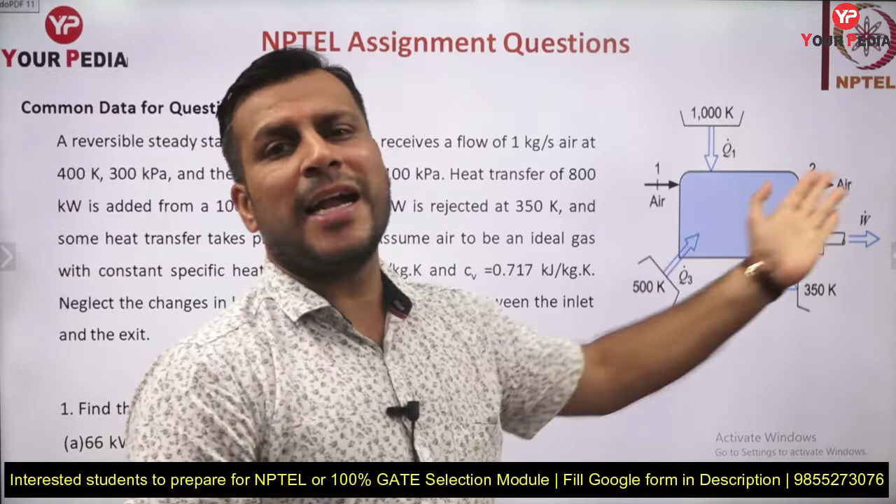So what is he asking? In the first part, he is asking for the heat transfer at 500 Kelvin — what will be the heat transfer in this case? Guys, typically when we solve this kind of question, most of you are aware of problems where heat is received from one source, from another source, and rejected to another sink. We are much aware of these kinds of questions.

But in this case, other than heat transfer, mass is also entering — it's not that only heat is entering. So if you want to find out this heat transfer, you cannot apply the cyclic integration here. You will not be able to apply the cyclic integration of dq by T equal to 0 here. With this you are not going to get the answer, although this device is reversible and in steady state. If you apply q1/T1 + q2/T2 (both positive heat addition) minus Q2/T2 which is at 350 Kelvin, you are not going to get the answer. Why? Because other than heat transfer, mass is also entering and mass is leaving.

So then how to solve? The question arises how to solve. Other than this, there are two parts in this question. This is part 1 and this is part 2. He is asking you the rate of work produced also - so rate of heat transfer, rate of work produced. Both these two things you need to find out, and two very important concepts we are going to discuss through this question.

Let me first discuss with you some of the very general things, like what do you mean by this reversible and steady state?

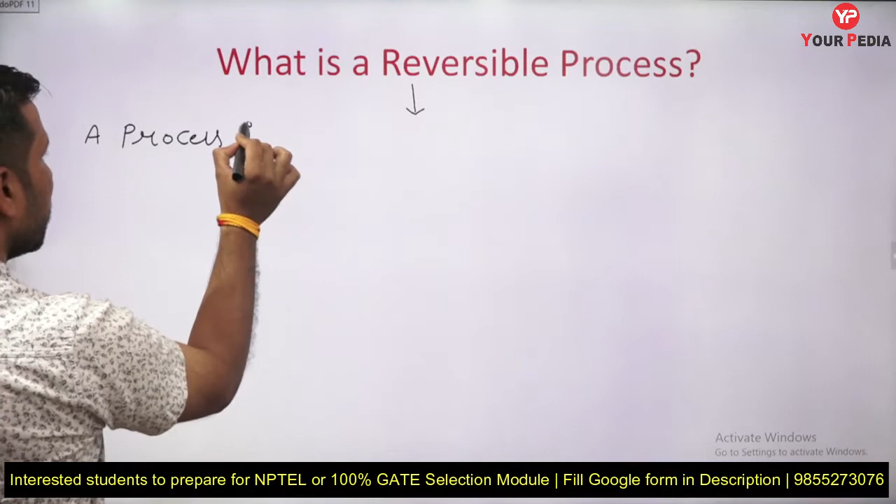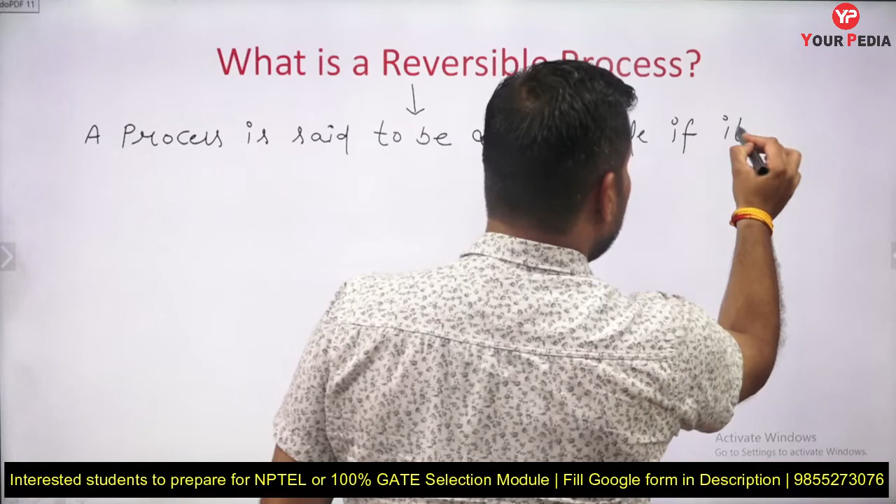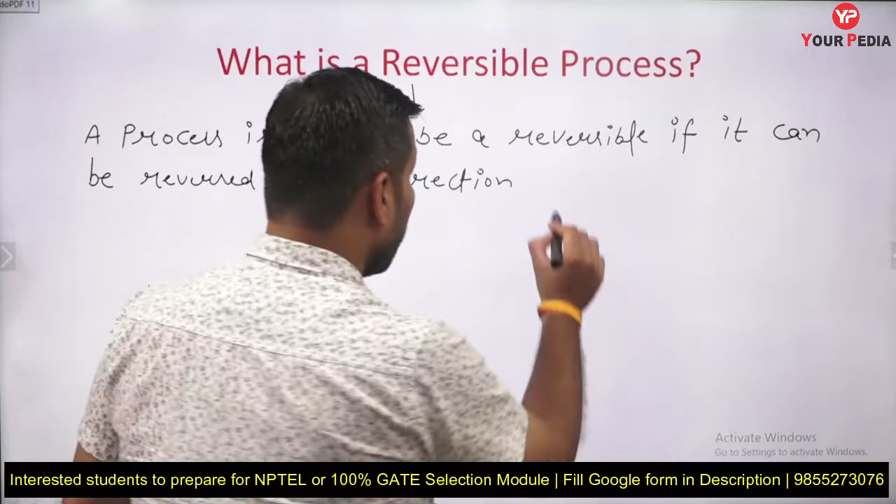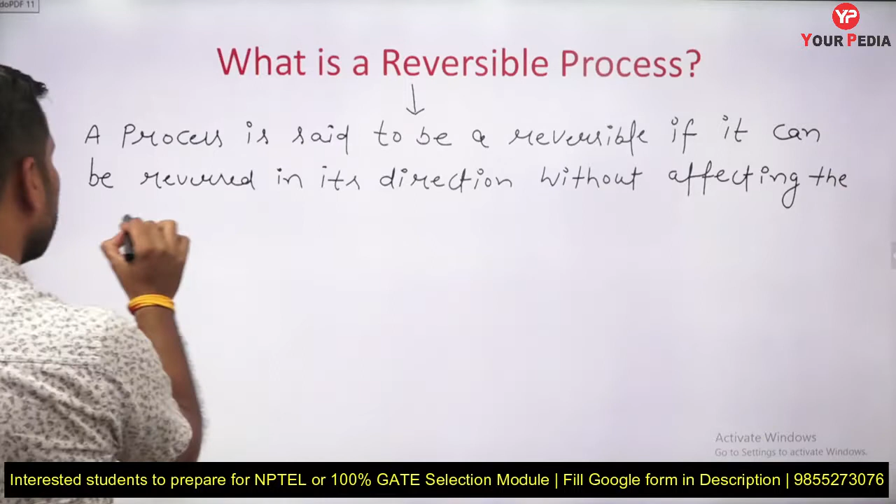You all know reversible means a process. Let me write it here. A process is said to be a reversible process if it can be reversed in its direction without affecting the universe. Universe means system plus surrounding. So merely reversing the direction of a process doesn't mean the process is reversible.

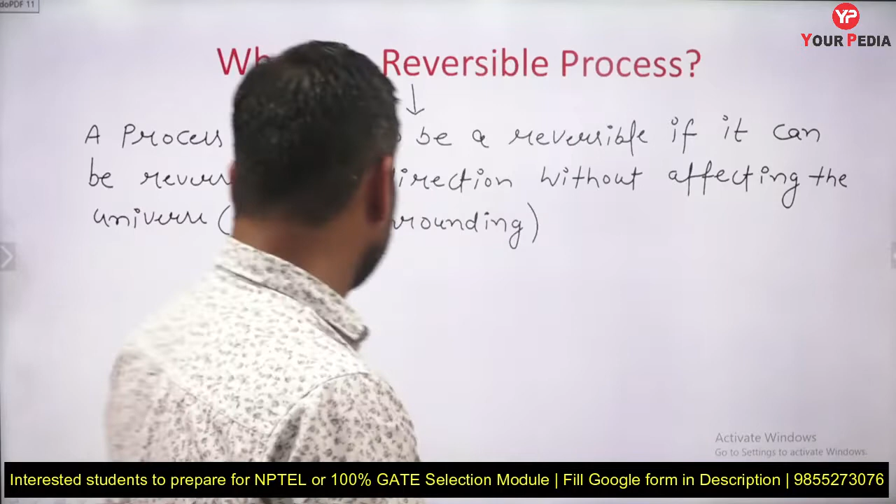Friction cannot be 0, so there is friction, and due to friction heat is going into the surrounding. Heat is lost into the surrounding.

It is negative actually, minus Q surrounding. Why? Because heat is entering into the surrounding - you are not taking heat from the surrounding, heat is entering into the surrounding.

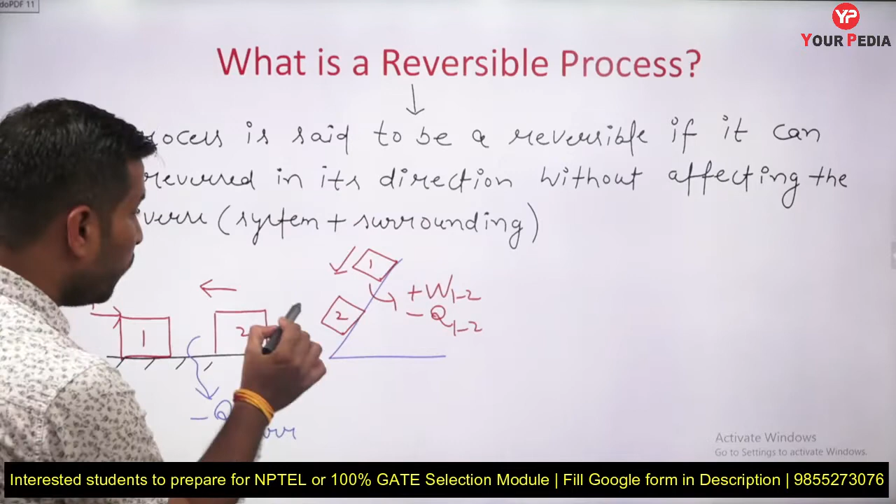Displacing - in this case, suppose 1 to 2 we got some positive work. Now moving 2 to 1, we are supplying some work. Suppose W1 to 2 is positive, W2 to 1 - this is W2 to 1 negative, for example.

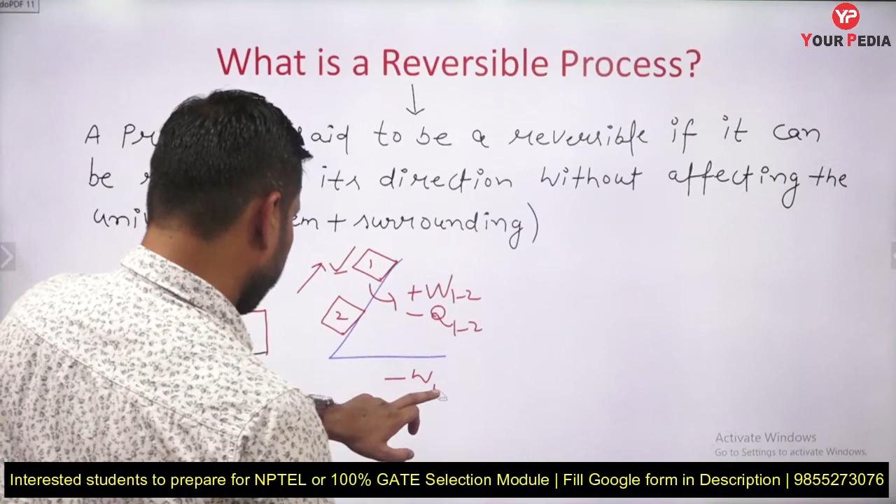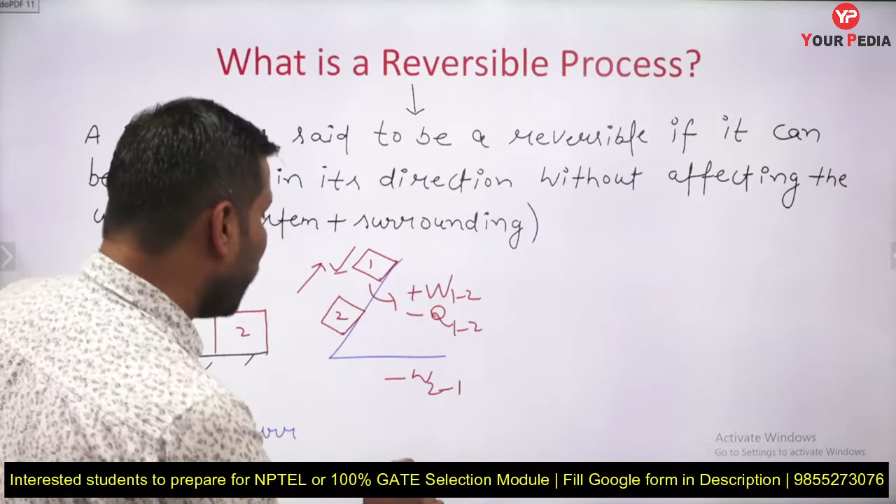So this is negative 2 to 1, but when you are moving it 2 to 1, again due to friction heat is going to generate, and that heat again goes into the surrounding. So Q1 to 2 is negative, heat is going into the surrounding. Q2 to 1, again heat is going to the surrounding.

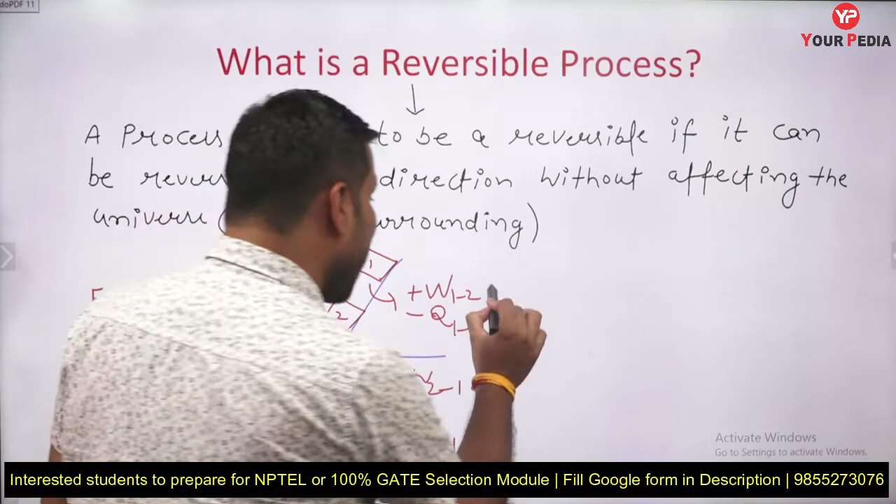So there is a net effect remaining on the surrounding. Net effect is there - net effect is remaining on the system and surrounding.

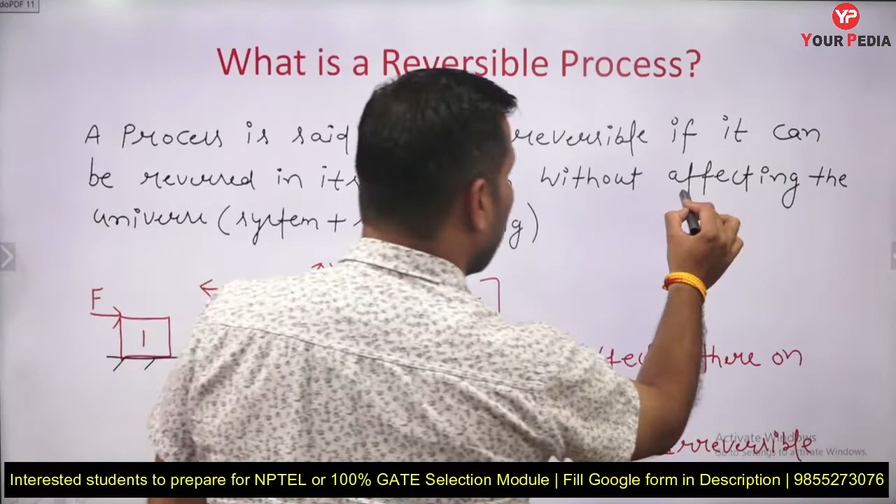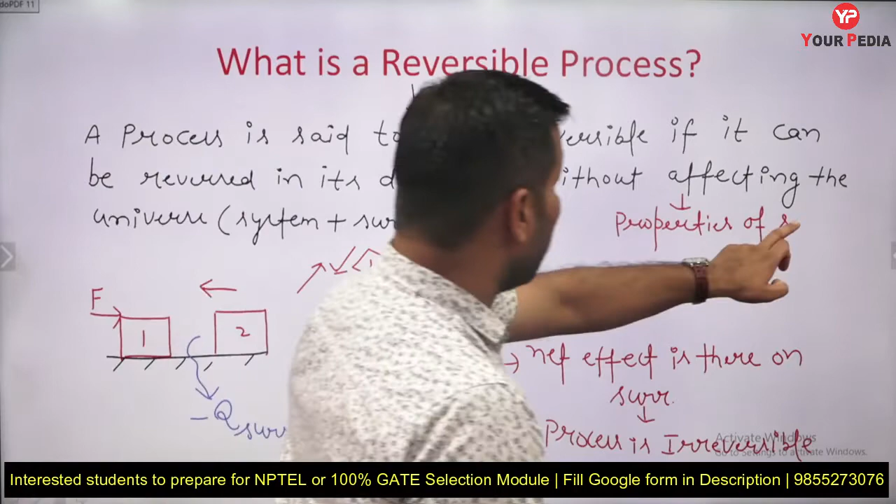Okay, a process is known as reversible only if you can reverse it in its direction without affecting the universe, means without affecting the properties of universe. देखो affecting the universe का मतलब क्या है? Properties of universe. यूनिवर्स का प्रॉपर्टीज अनअफेक्टेड रहना चाहिए. There will be no change in the properties of universe. Okay, properties of universe.

But if due to some process the properties of the universe, like it may be system, it may be surrounding, are changing, it means the process is irreversible. In actual case, real life, there is no such reversible process possible. All processes are irreversible only. But you can give some kind of example, like a very slow, or quasi-static isothermal compression or expansion of a gas. That process you can equate with the kind of reversible process.

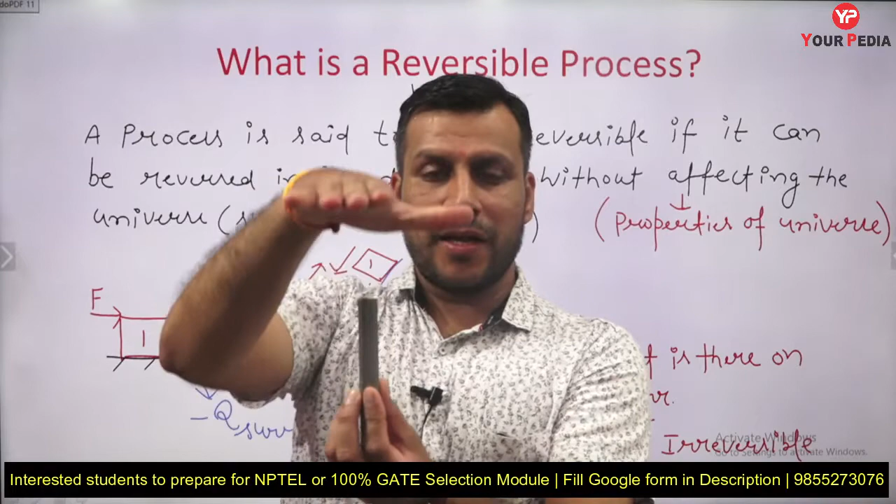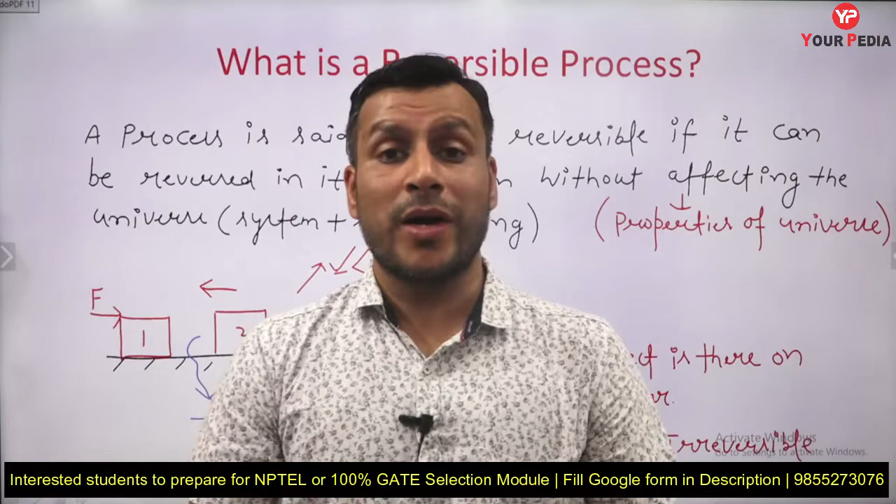Similarly, suppose you are compressing a spring, you are expanding the spring. So compression and expansion of a spring without any kind of hysteresis loss, that is also a kind of reversible process. But in real cases, some kind of hysteresis losses are going to occur. What is hysteresis loss? It is a kind of loss in mechanical energy. When you are carrying out cyclic compression or extension of the spring, some loss in mechanical energy occurs. That is known as hysteresis loss. So in real case, that may be there.

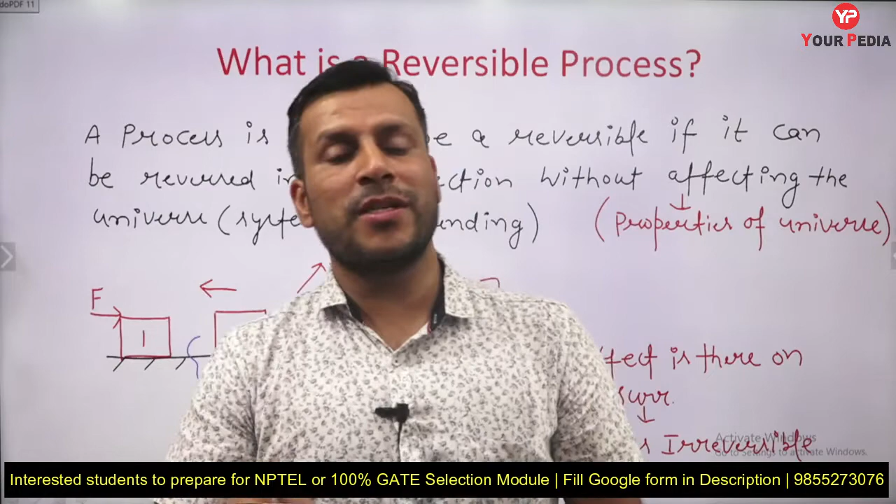Okay, so what you need to think: in a reversible process, no effect is going to remain. There is no such kind of loss in energy going to take place. But in an irreversible process, there must be some loss in energy. Exergy destruction is going to take place. There must be some irreversibility, and there must be some entropy generation in all real processes. Okay, so I think you got the idea. What is a reversible process?

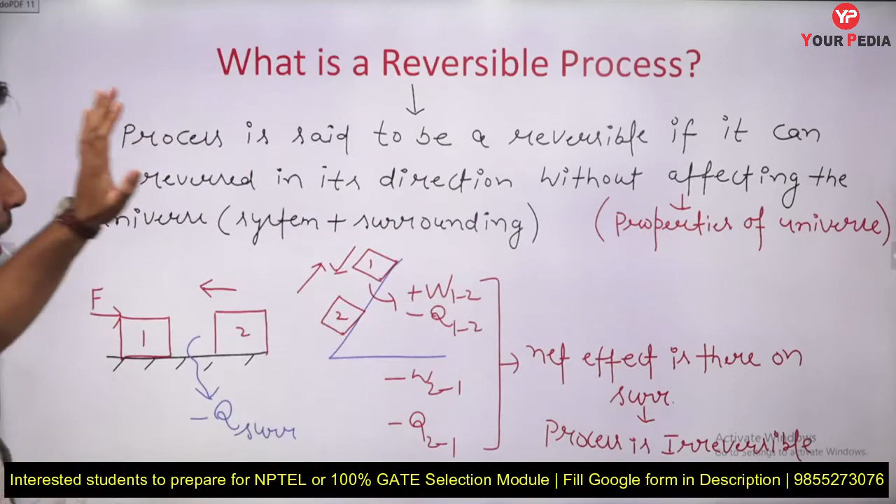A process is said to be reversible if you can reverse it without affecting the properties of the universe. It means the entropy generation is zero. It means irreversibility, which is T naught delta S generation, is zero in a reversible process. किसमें? Reversible में. Reversible में ये क्या होगा? Zero होगा. Entropy generation zero, irreversibility will be zero.

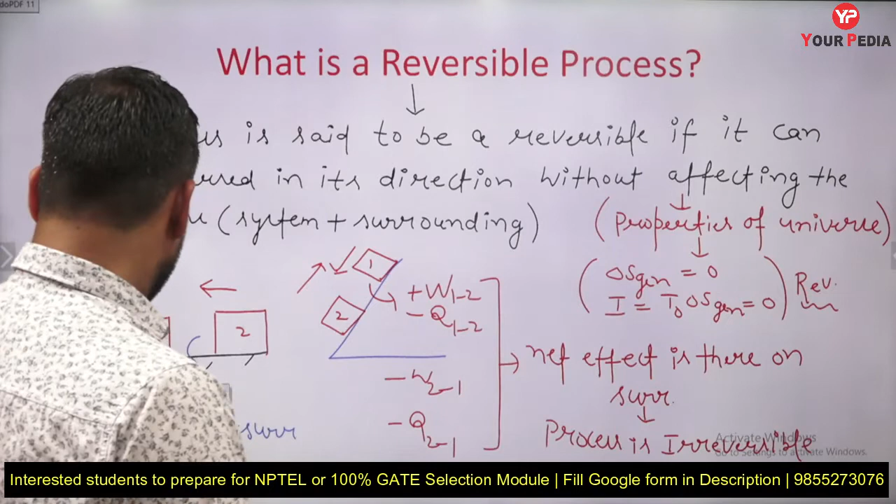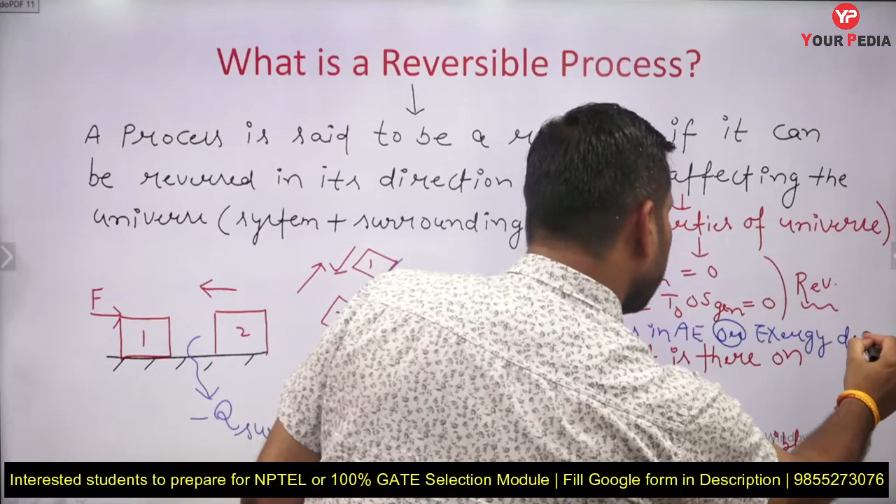And what is irreversibility, guys? Irreversibility is nothing but loss in available energy. Irreversibility को ही हम क्या बोलते हैं? Loss in available energy or exergy destruction. So you can mention it as irreversibility, loss in available energy, or exergy destruction. All will be zero in case of reversible process.

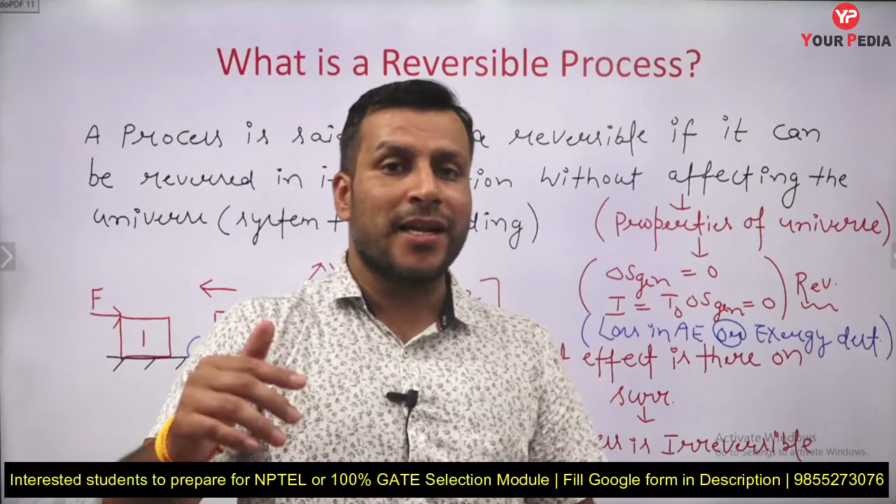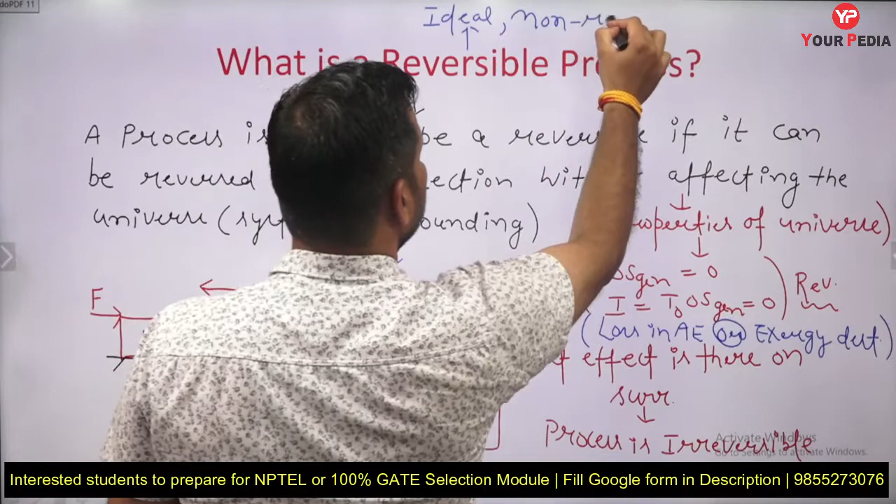But reversible processes are not real processes, guys. These are non-real, hypothetical, or ideal processes. So all reversible processes are ideal, non-real processes. But these are most efficient. ये क्या होते हैं बच्चों? Most efficient. How can you say these are most efficient? Because there is no loss of energy.

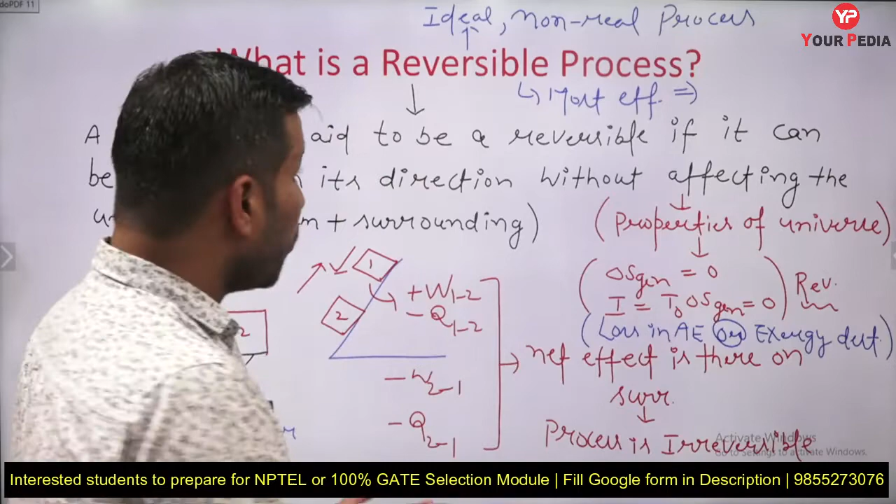And if there is no loss in energy, it means the process is most efficient. That's why reversible processes are the most efficient. I hope you got some basic understanding about this reversible process. Okay, चलिए next हम move करते हैं बच्चों.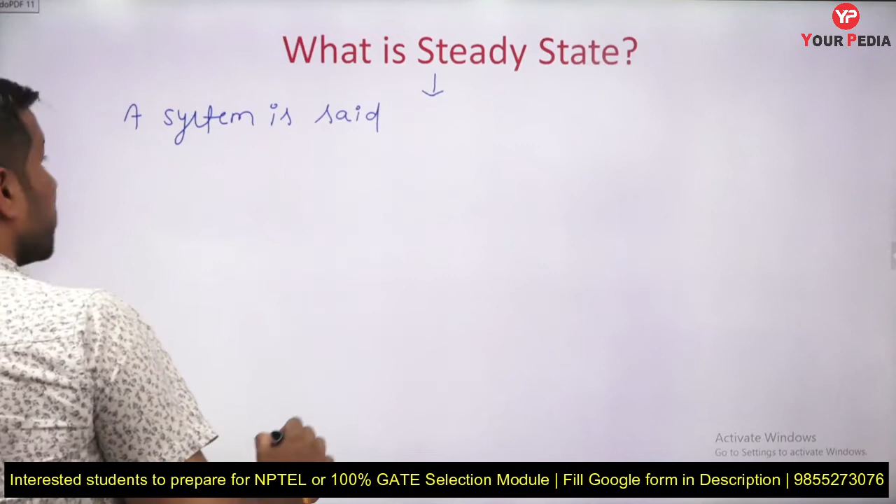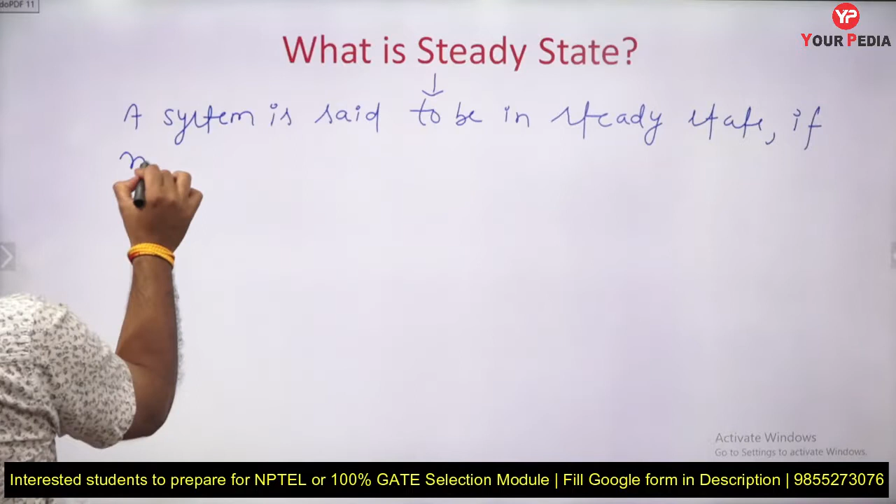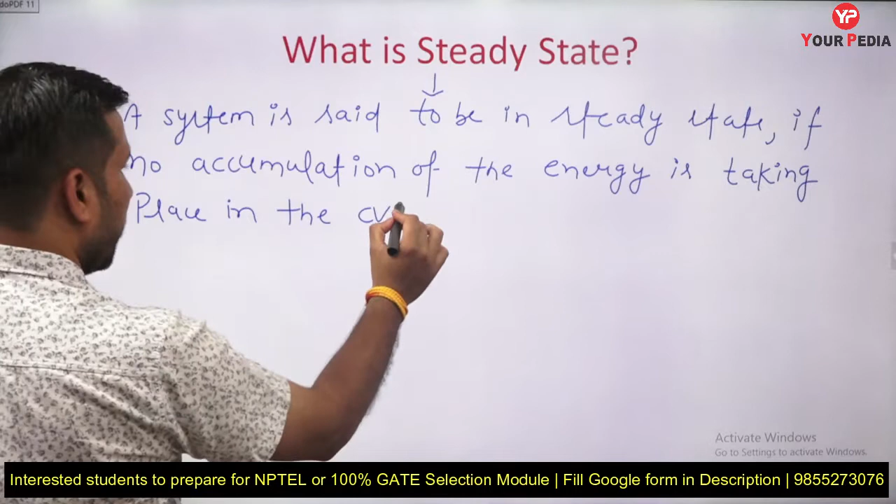Steady state means a system is said to be in steady state if no accumulation of the energy is taking place in the control volume. If no accumulation of the energy is taking place in the control volume, then that state of the system is known as steady state.

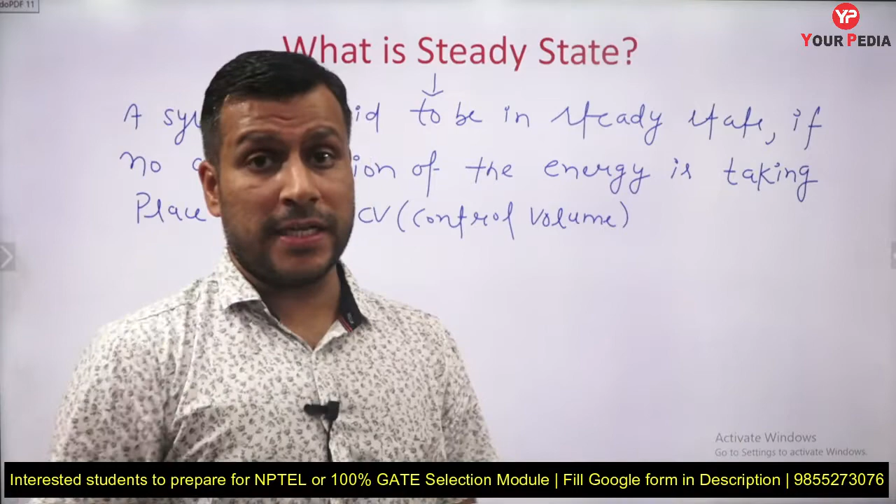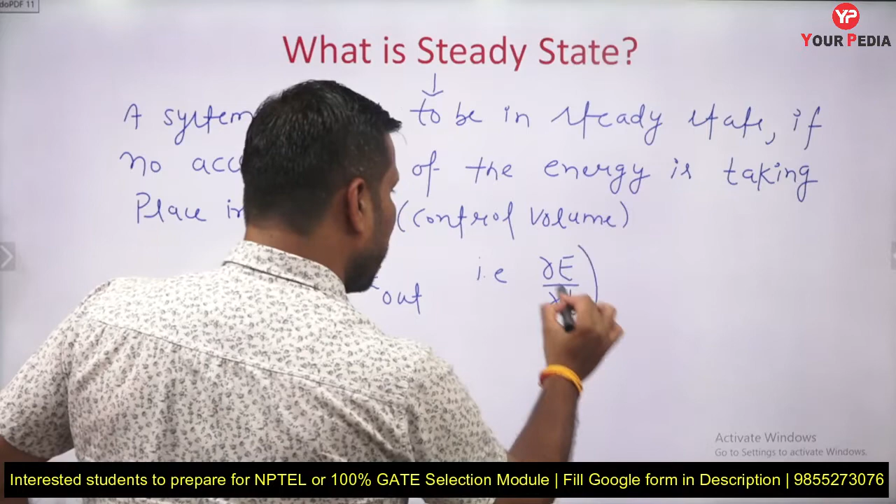Okay, no accumulation of the energy is taking place means, when will this happen, kids? When whatever energy is entering, that is equal to energy leaving. It means that the rate of change of energy of the control volume is zero. The energy of your system is not changing with time. So if energy is not changing with time, then del E by del t of the control volume will be zero.

Okay, so what is the general equation, guys? The general equation is rate of energy in minus rate of energy out is equal to del E by del t of the control volume. This is the general equation for any steady or unsteady system. For unsteady, this term is going to exist, but for steady this term will be 0. And if this term is 0, then you can write the rate of energy in is equal to rate of energy out. This is a very important equation for steady flow.

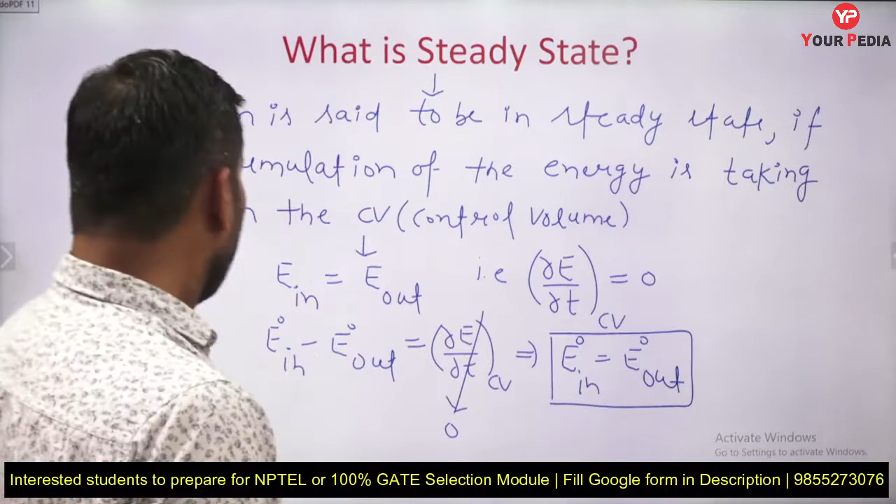Steady flow, and this equation we are going to apply to this particular question. Rate of energy in equal to rate of energy out. There is no accumulation of energy taking place in the control volume. One more thing you can write here: the properties of the control volume. Because if there is no accumulation of energy in the control volume, it means the properties of the control volume are not going to change with time.

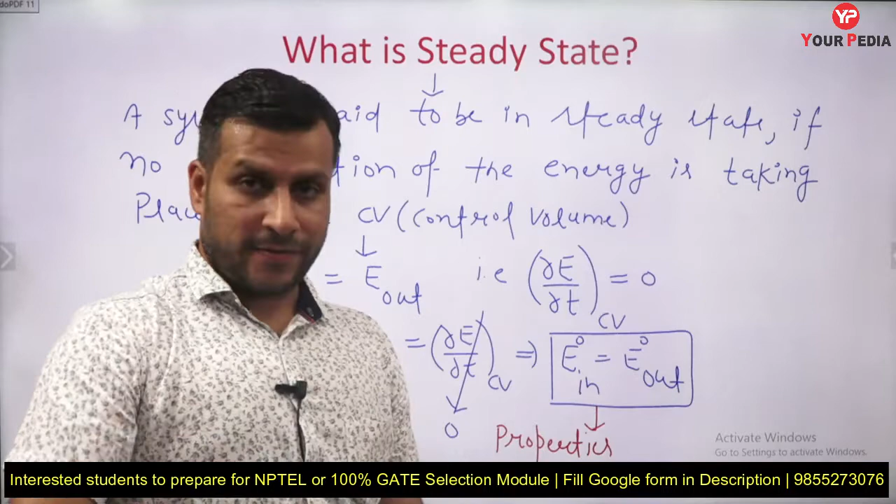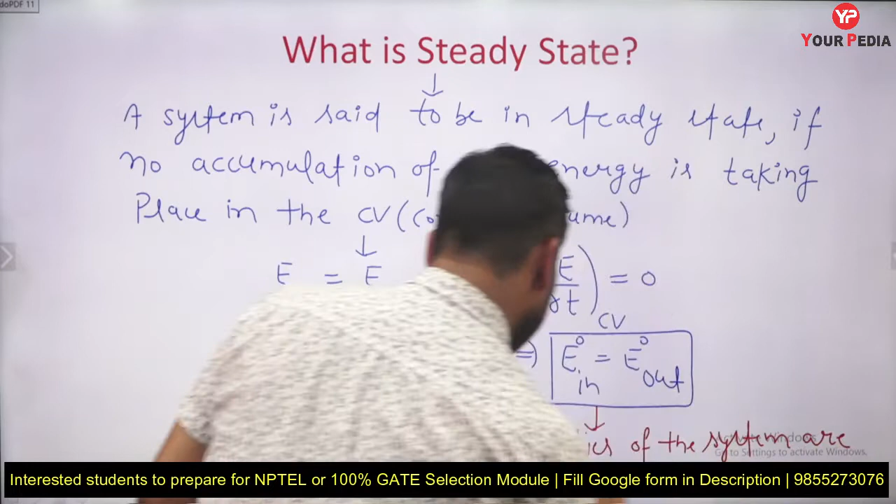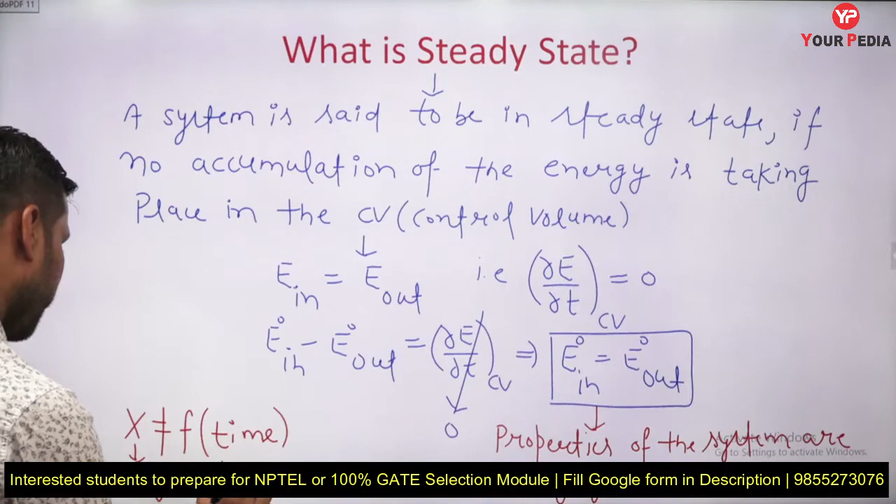Properties are invariable with time. Properties of the system are not changing with time. So suppose any property x is not a function of time. This is any property. But in case of unsteady, the property becomes a function of time, because accumulation of energy takes place in an unsteady system.

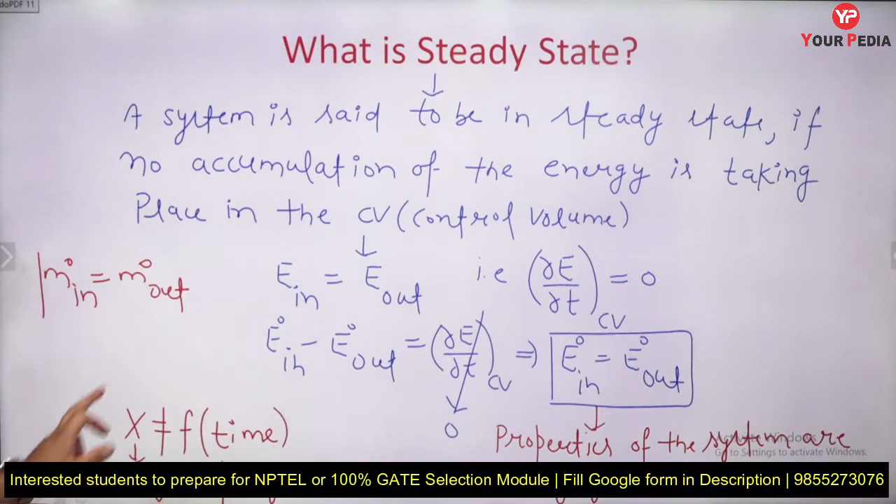Okay, so in steady state energy in equal to energy out, and here you can write one more thing: mass in equal to mass out. There is no accumulation of mass taking place either. No accumulation of mass as well as no accumulation of energy in case of steady state. So I think you got some basic idea about steady state and reversible process.

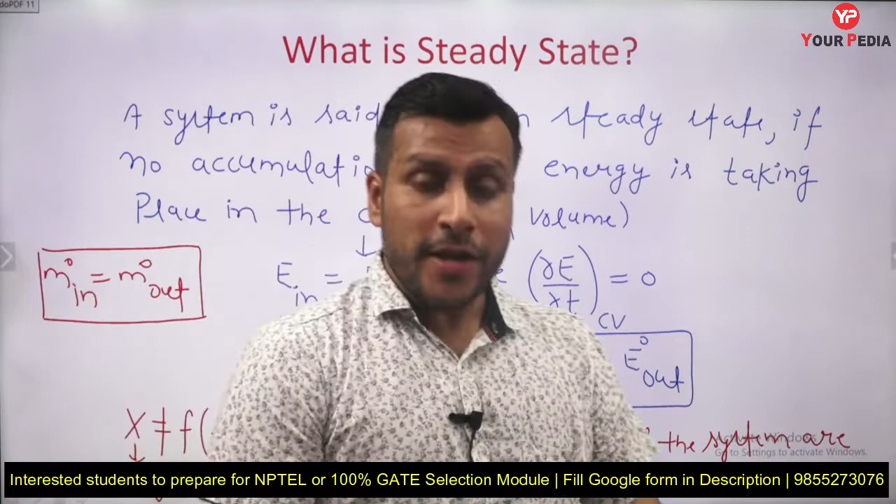Now let us quickly move to our question. So this is the question. I just discussed these basic things so that you will get some basic idea. I hope you also know all those kinds of things. So now this is the question in front of us.

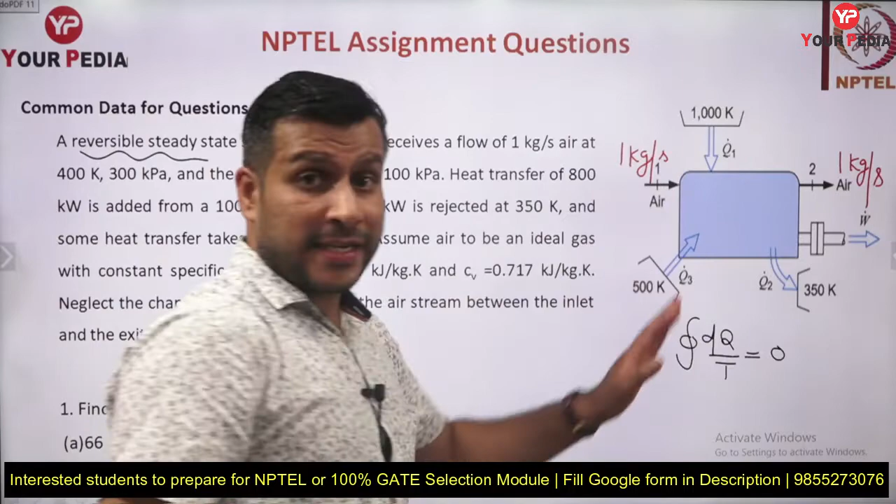1 kg per second of air is entering; this is the mass of the air entering. Obviously, if this is in steady state, whatever mass is entering, the same mass is leaving, because there is no accumulation of mass. He has not given you the exit mass, but we know it, because it is in steady state. The process is reversible. So what idea are we going to get?

This we cannot write, because other than heat, there is mass interaction also taking place. But what can we use here, kids? We can use that entropy generation will be 0, because this is a reversible process. So if this is reversible, entropy generation will be 0.

Entropy generation will be 0. Okay, this is in steady state. Steady state में भी है. It means what? It means the change in entropy of the control volume, dS/dt of the control volume, that is also 0.

Entropy is also a property, guys. It is a kind of extensive property, so it depends on the size or mass of the system, but entropy is also not going to change. In steady state, the change in entropy of the control volume is also 0. There is no entropy generation. Why? Because the process is reversible. It is in steady state, so change in entropy of the control volume is 0.

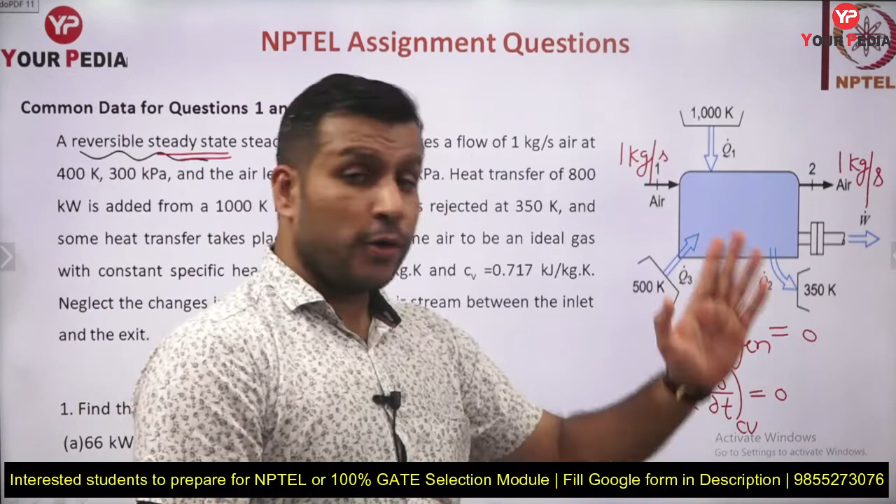So from this, we will get the very important relationship: rate of entropy in minus rate of entropy out plus rate of entropy generation. I am writing all these terms in terms of rate actually. Rate की term में लिख रहा हूँ. Why? Because he has given you all the heat transfers in watts.

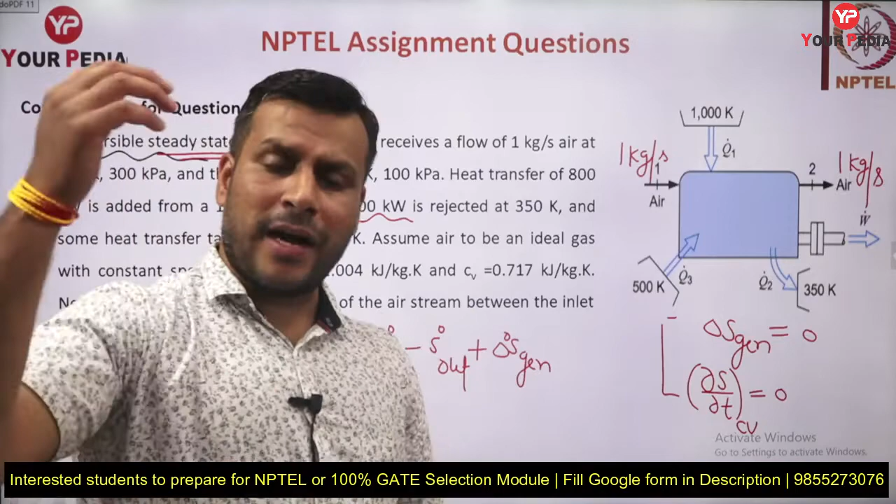Okay, और आंसर भी किस में आ रहा है? Watts. All answers are given in watts. That's why I am writing entropy rate, and the energy balance also I am going to write in terms of watts. So rate of entropy in minus rate of entropy out plus entropy generation equals rate of change of entropy of the control volume.

Now you know in steady state this is 0 and this is also 0. So whatever entropy is entering, that is equal to entropy leaving. Got that idea, guys? So this is the first equation which we got. पहला इक्वेशन अपने पास आ गया है.

But other than heat, the mass is also bringing entropy inside the system. Listen very carefully: if there is no mass transfer, how much entropy is heat going to bring? The heat is going to bring Q/T positive, minus Q/T for heat that is going out. So entropy of the system is going to decrease when heat is going out.

So Q1/T1 plus Q3/T3 minus Q2/T2, that will be 0 if there is no mass transfer, because mass is not entering, so mass is not going to bring any entropy. Suppose it is a closed system, only heat transfer, no mass transfer; then you can write the equation I mentioned earlier, cyclic integral of dQ/T equal to 0, because the process is reversible.

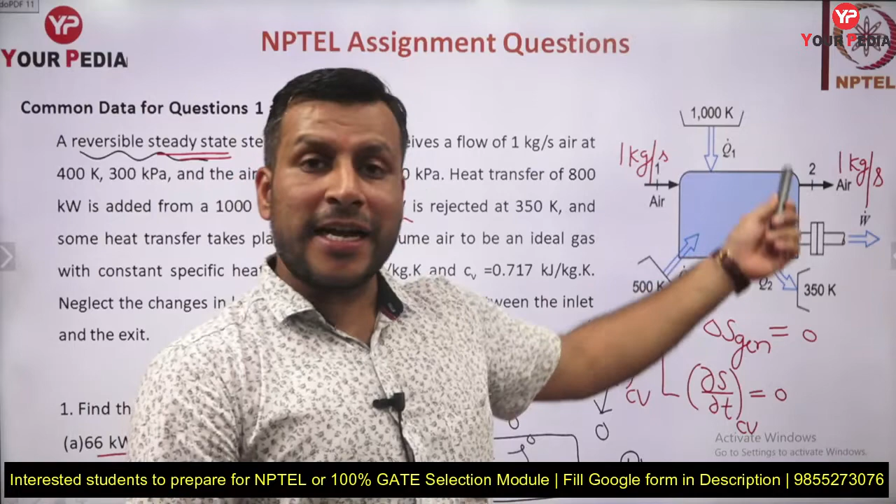But in general, the cyclic integral of dQ/T, you know how we write it: Clausius inequality. तो वहाँ पे अपने को क्या समझना पड़ेगा? It can be 0 or less than 0. For reversible it will be 0, for irreversible it will be less than 0. And dS is greater than or equal to dQ/T. For reversible, dS equals dQ/T. That's why the entropy heat is bringing is Q/T, in case of a reversible process.

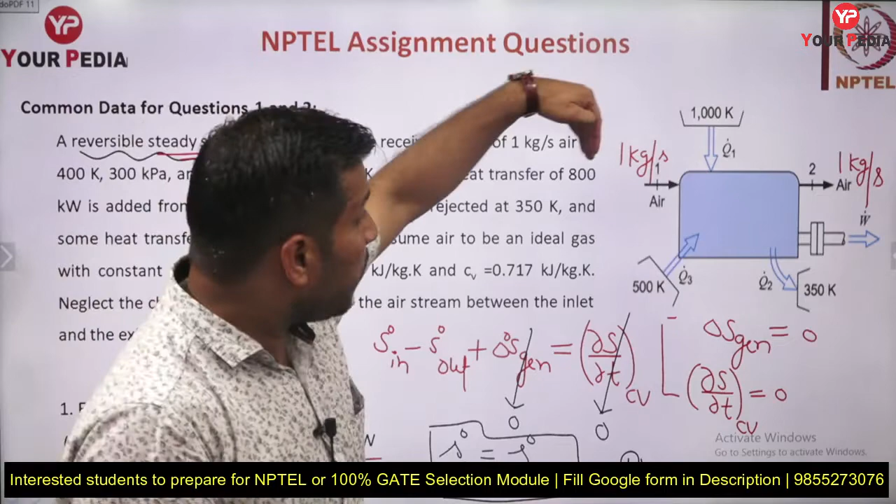But here the mass is also entering, so you need to include whatever entropy this mass is bringing in and taking out. Suppose this point is 1 and this point is 2, mass flow rate is the same, so entropy in with mass is m dot s1 and entropy out is m dot s2. So plus m dot s1 minus m dot s2, or you can write it on this side, आप इसको इस side भी लिख सकते हो, because entropy in equals entropy out. So this is the first important equation.

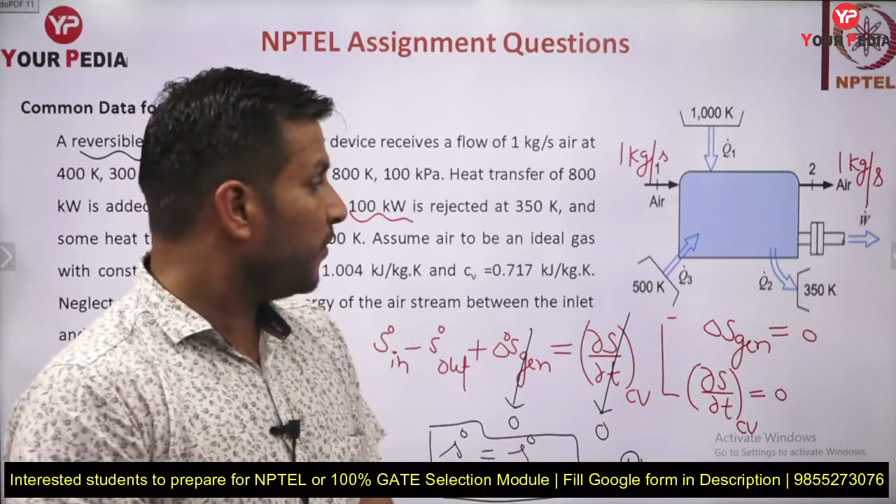Other than this, guys, we have one more equation. The system is in steady state, so whatever energy is entering is equal to energy going out. No accumulation of energy. Energy in equals energy out. But what is entering, guys? Is only heat entering, or heat and work interaction? No. Other than heat and work interaction, mass interaction is also taking place, and mass can also bring some kind of energy.

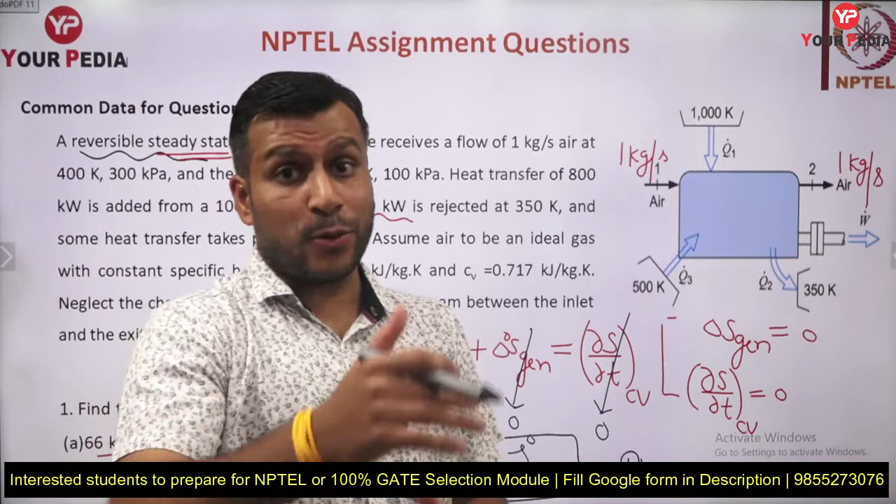But here if you will check, neglecting the kinetic and potential energy changes, काइनेटिक एनर्जी और पोटेंशियल एनर्जी चेंजेस को अगर हम नेग्लेक्ट कर दें, neglecting kinetic energy and potential energy changes,

so mass can bring some kind of kinetic energy, potential energy, and what? The enthalpy. And you can write it here internal energy also, or entry flow work, exit flow work. But you know how we write steady flow energy equation? H1 plus C1 square by 2 plus gZ1 plus Q, that is equal to H2 plus C2 square by 2 plus gZ2 plus work.

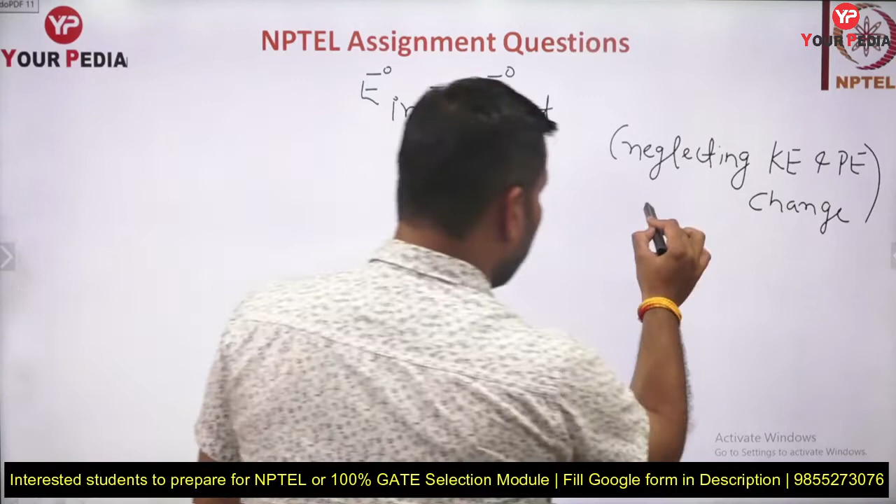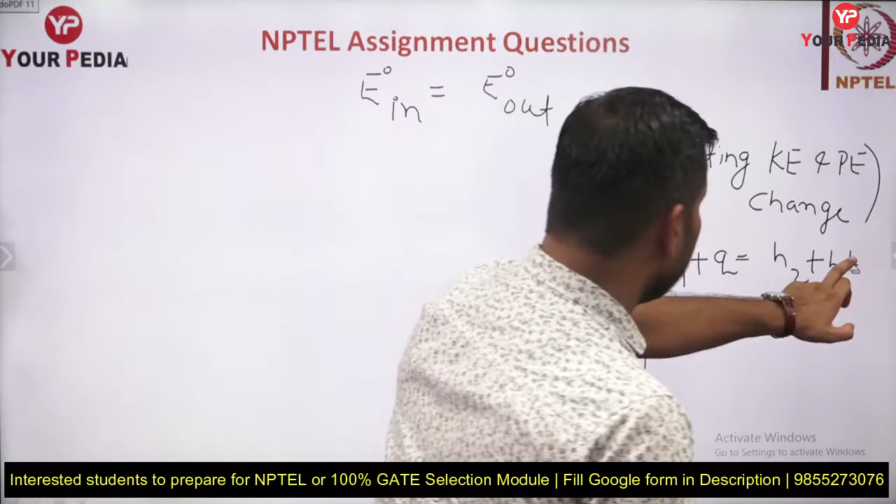But if there is no change in kinetic and potential energy, then we can simply write it as H1 plus Q, that is equal to H2 plus W, something like this. H1 plus Q, that is equal to H2 plus small WCV. That will be small WCV in case of what? Neglecting the kinetic and potential energy changes.

Are you getting guys? So similar kind of energy equation we can write it here also. This is capital E, energy in. Mass is entering with some enthalpy H1, because it is entering at point 1. So this is H1 plus, how much Q is entering guys? Q is entering at 1 and 3. So I am writing it as Q1 plus Q3, yes or no? H1 plus Q1 plus Q3.

How much energy is going out guys? Energy going out is H2 plus Q2 plus W, yes or no? This is in terms of total energy, neglecting kinetic and potential energy changes. Now how you can write this H1? This you can write it as M1 dot into Cp T1, considering air is an ideal gas, plus

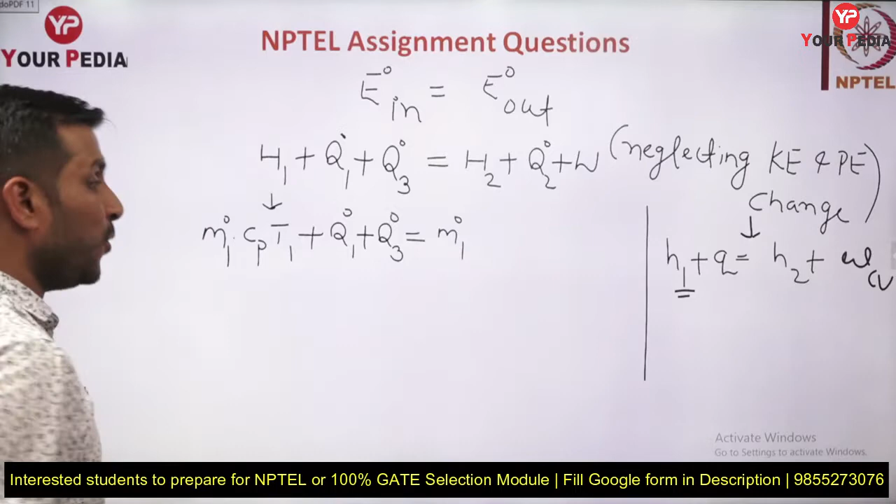Q1 dot plus Q3 dot equal to M. This mass is same, so you can write it as M1 dot or M2 dot, both are same. दोनों क्या है बराबर है. So this is M2 dot Cp T2 plus Q2 dot plus W. Now let us put all the values.

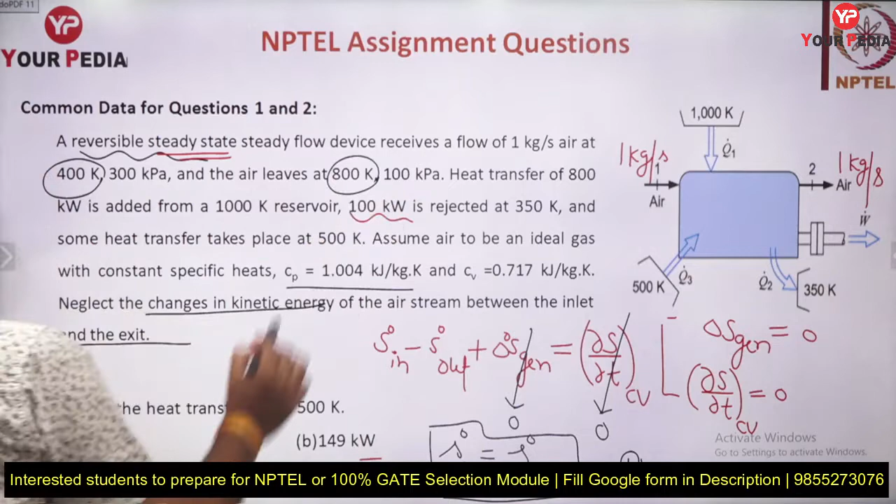So M1 dot is what? This is 1. इसको मैं इधर ले आता हूं. So this is 1 into Cp is 1.004 kilojoule per kg Kelvin. I think these values are given to you. The change in temperature is T1 minus T2. The entry temperature is 400. The exit temperature is 800. So 400 minus 800. Plus, how much Q is entering?

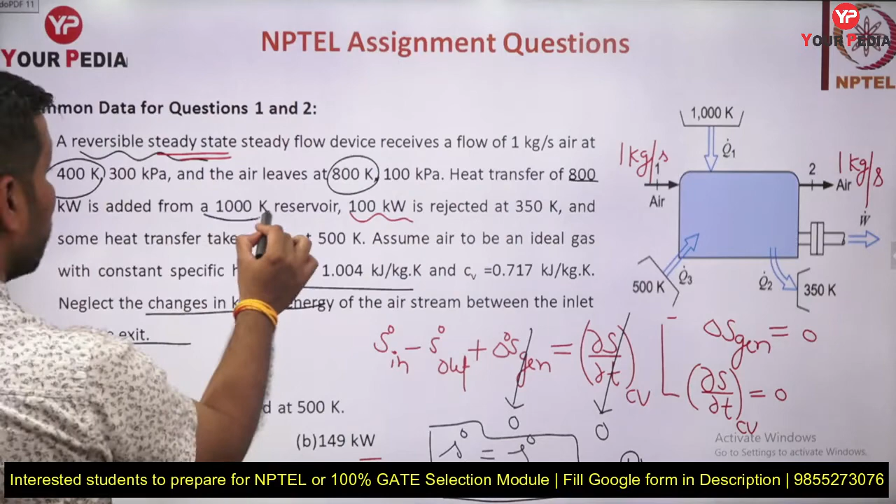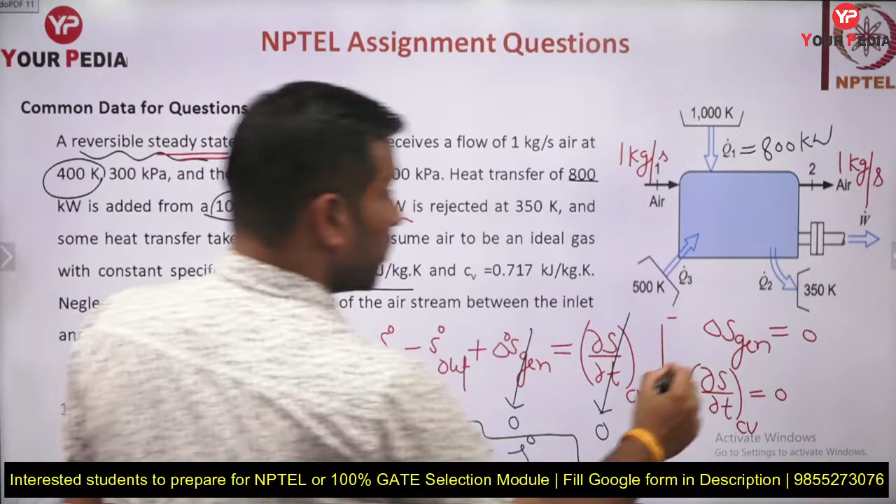How much Q is entering, guys? Let's check it here. Heat transfer of 800 kilowatt is taking place from the 1000 Kelvin reservoir. Means Q1 equal to 800 kilowatt. 100 kilowatt is rejected, so this is 100 kilowatt. And Q3 we don't know, this we want to find out actually.

ये तो अपने को नहीं पता. And this one is 100 kilowatt. This is positive, this is negative. Q3 we don't know. ठीक है, चलिए. So Q1 is 800, Q3 we don't know. This term already we have mentioned it here, so no need to write minus here. Minus यहाँ लिखना नहीं है बच्चों.

Why? Because already we are writing energy in equal to energy out. So अगर आपको इसको इधर लेके आना है, then obviously that will become negative. Energy in will be positive, energy out will be negative. When we are writing it on this side, heat added to the system is considered positive, rejected by the system is considered negative.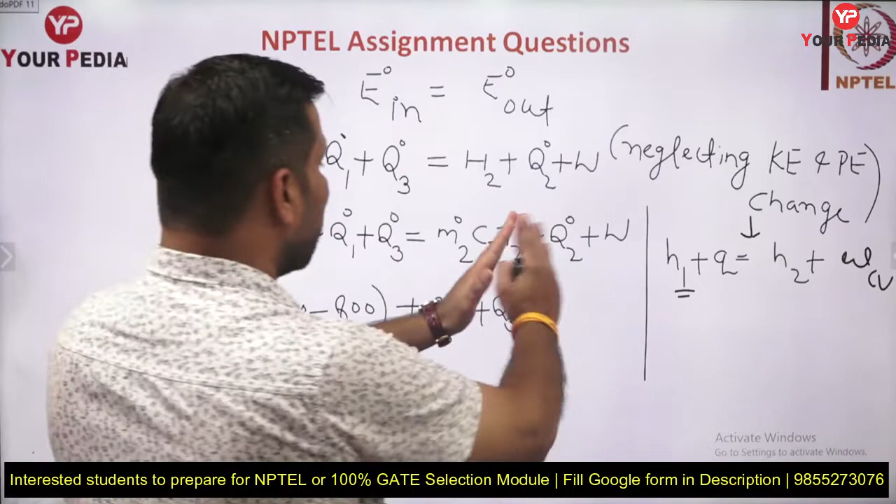Similarly, work done by the system is positive, but if work is done on the system, it will be negative. If you are writing work this side, that is negative work; when it goes the other side, it becomes positive. So we are writing energy in equal to energy out, that's why no sign is required. So Q2 is 100 plus W. Now can you solve and make some equation out of this, guys? क्या इसको solve करके कुछ equation बना सकते हो बच्चों? Yes.

So let me solve it for you, and you also can try to solve. You can try to make some kind of equation out of this. Okay, so if you solve this, you will get 298.4 equal to W minus Q3 dot. So this is the equation we are going to get. Suppose this is equation number 2: 298.4 equal to W minus Q3 dot. This equation we get by applying the energy balance.

Now let us apply the entropy balance also, the one we were writing earlier. So let me add a slide here. Fine. So now we can write the entropy balance here.

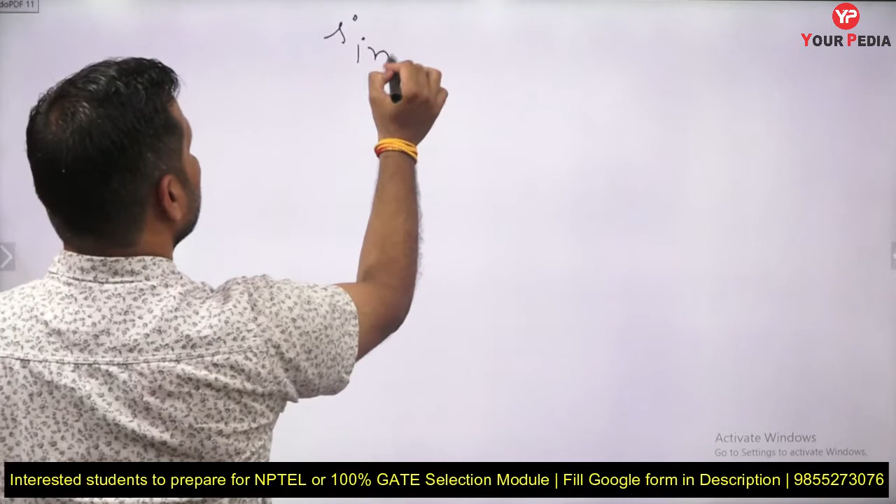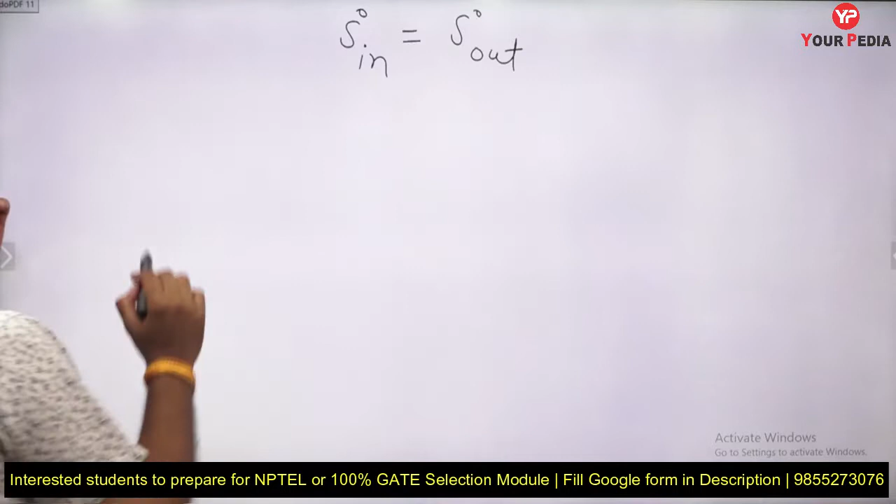Entropy balance, how can we write it? Rate of entropy in is equal to rate of entropy out, or you can write it in capital terms also because masses are same. So we write it in capital form: entropy in equals entropy out. How much entropy is heat bringing? That is Q1 dot divided by T1, that will be positive.

Plus Q3 dot divided by T3, plus M1 dot into small s1. That is equal to how much entropy heat is taking out: Q2 dot divided by T2 plus M2 dot into s2. This is how we can write the entropy balance. Entropy in equal to entropy out.

Now you know all these values. Q1 is 800 kilowatt divided by 1000. Q3 dot we don't know, divided by T3. What is T3, guys? T3 is 500 Kelvin, so you can write it here, plus M1 dot is 1 kg into s1 minus s2.

Or I will take this to the other side, because for change in entropy we are familiar with formulas like s2 minus s1. So let me bring this heat to this side, so this will be minus. This is heat which is going out.

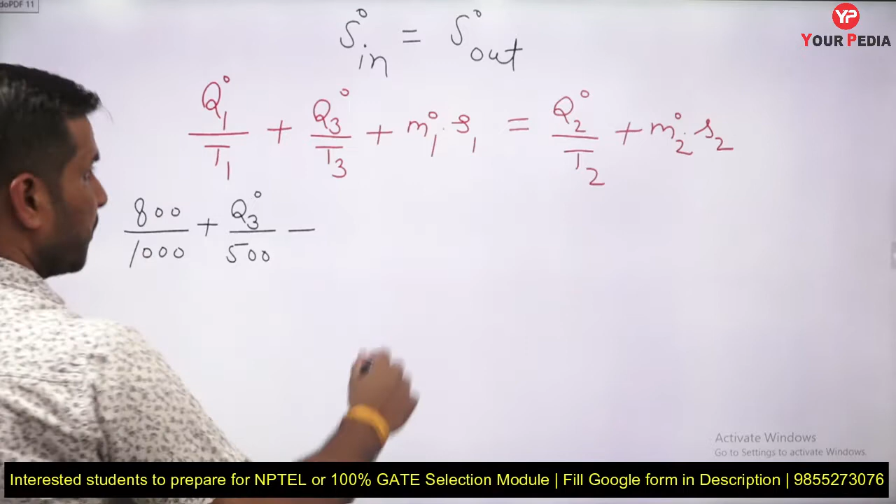How much heat is going out? This is 100 divided by the temperature, 350, equal to M1, M2 both same, which is 1, into s2 minus s1. This is the final equation, guys. Now how to write s2 minus s1?

Entropy change for an ideal gas, s2 minus s1, specific entropy change, is Cp ln T2 by T1 minus R ln P2 by P1, because the temperatures and pressures are given to us. If you check here, the entry temperature and entry pressure are given.

Here the entry temperature is 400 Kelvin and entry pressure is 300. The exit temperature is 800 Kelvin, exit pressure is 100 kilopascal. So entry temperature, pressure and exit temperature, pressure we know.

Now put it all here, and you know the Cp value also. Cp value is given, Cv value is given, and the difference Cp minus Cv is R. If you subtract, you are going to get a value close to 0.287, because this is very close to 1.005.

This is 0.718, so you are going to get 0.287. You can check. R we know, this we know.

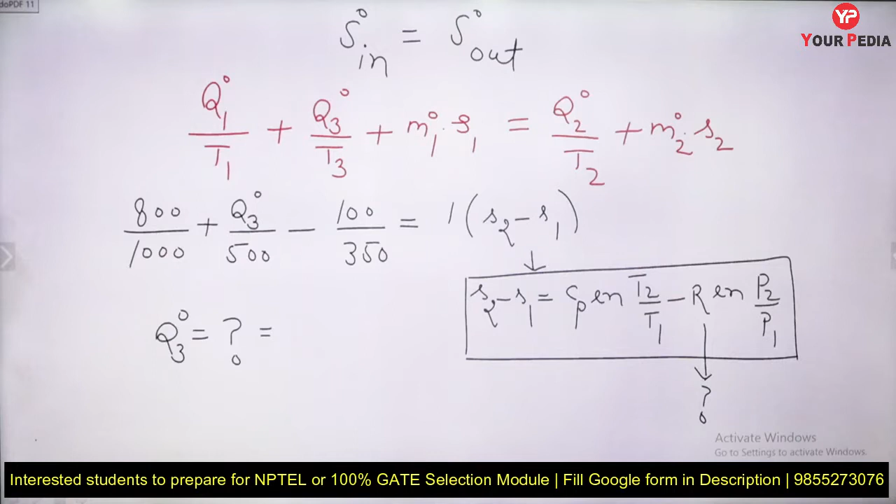Solving this term, we will get S2 minus S1. This will come out close to 1.01121, which is in kilojoule per kg Kelvin, because this is specific entropy.

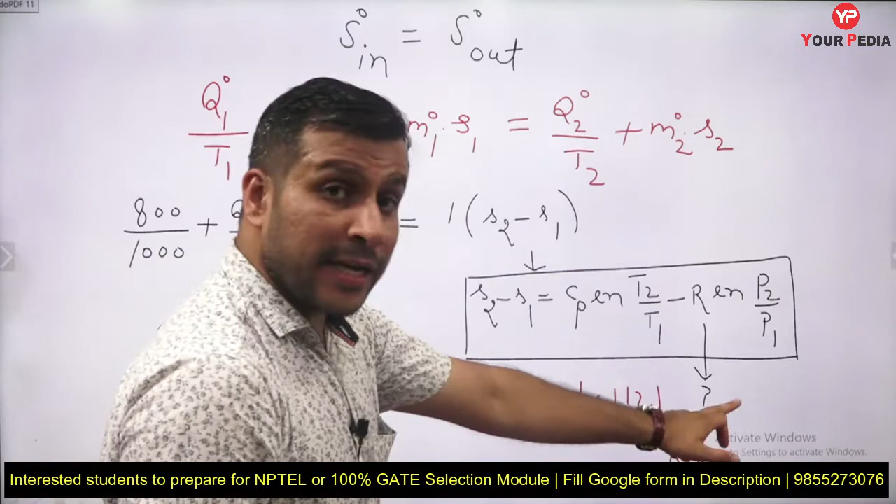If you multiply it with kg per second, we will get kilowatt per Kelvin. So these all terms are representing kilowatt per Kelvin. Solving this, we are going to get Q3 in kilowatt. Now can you tell me guys what value you are getting for Q3?

So solving this, we will get Q3 equals 248.46 kilowatt, which is very close to 248 kilowatt. You can check whether you are getting this answer or not. So option D becomes the right answer for this first question.

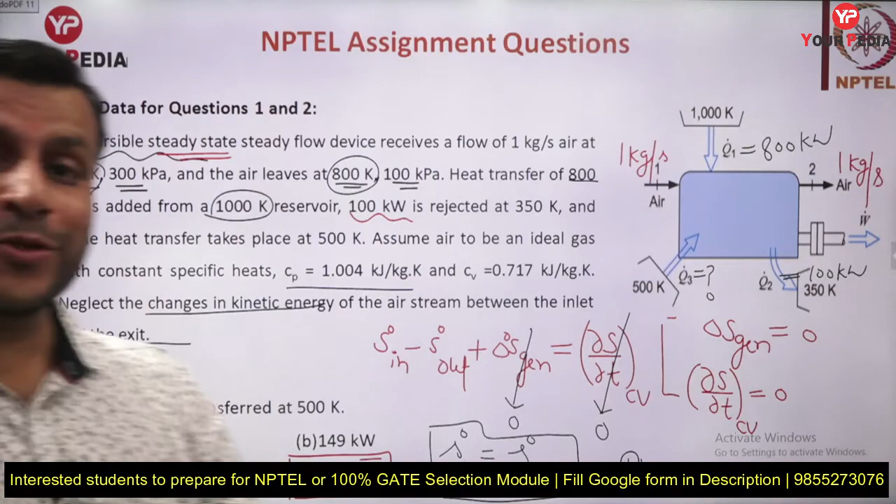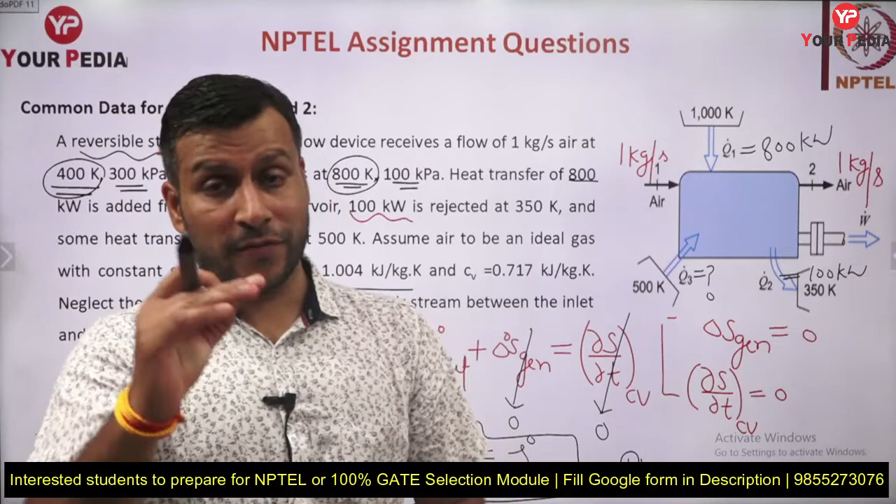So what information did we get through this question? The process is steady, the process is reversible, but we cannot apply cyclic integration dQ by T because there is mass transfer also. So we need to apply the entropy balance here. This is a very important concept which we learned, and other than this we learned the energy balance also.

Now we know this heat transfer, and using the energy balance we developed an equation, equation 2. This we got close to 248 kilowatt. So if you put this 248 kilowatt, we will also get W, the work transfer. So two equations we developed, one using the entropy balance, second using the energy balance.

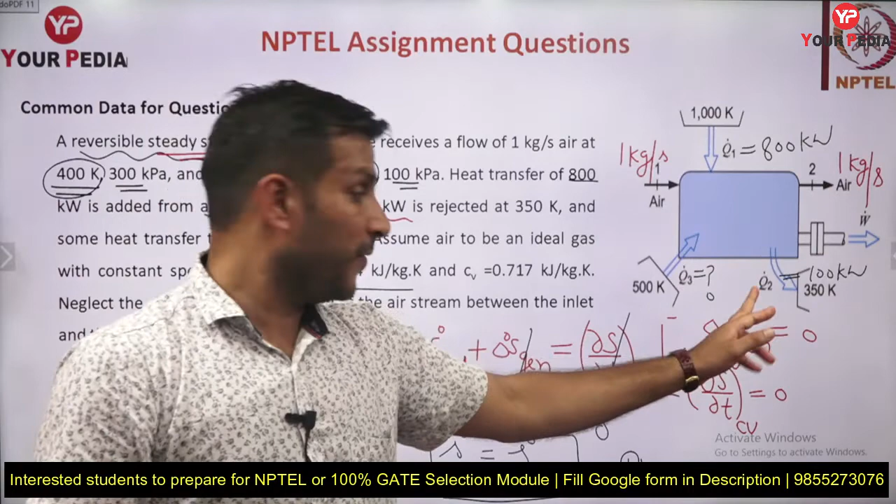Steady state energy balance and entropy balance using what? Using the reversible process, entropy generation is 0, del S by del t of the control volume is 0. So this is for steady, this is for reversible: for reversible entropy generation is 0, for steady the change in entropy of the control volume is 0. If you know this, only then will you be able to solve this particular equation.

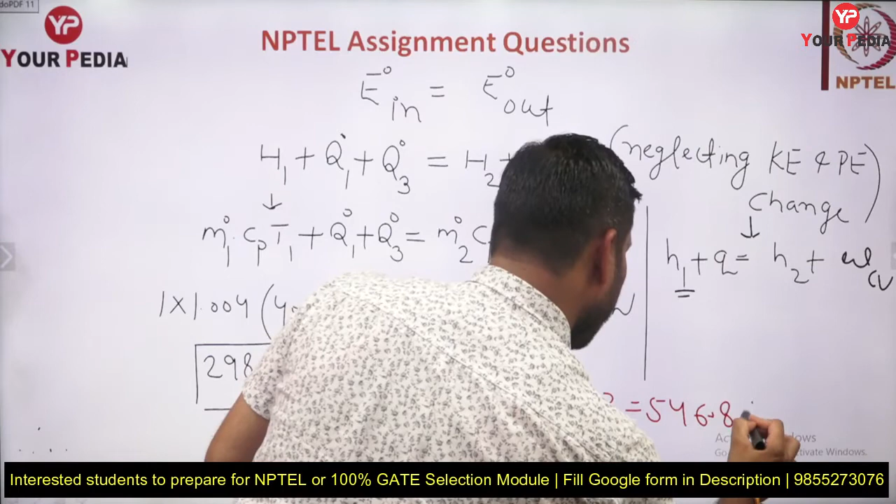Let me write the work answer also in front of you, so that you will be able to match your answer. So the answer for work will come out 546.86 kilowatt. So this will be the work expression we are going to get.

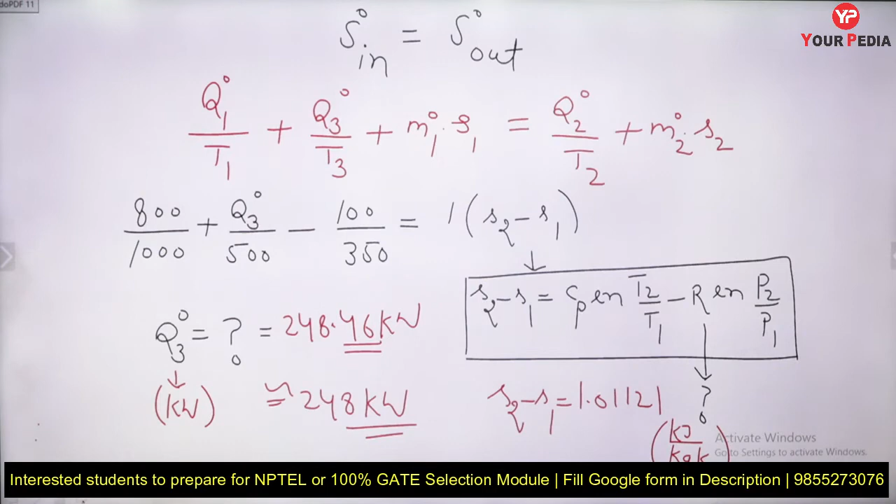I think you got the basic understanding guys. So option B, 546, will be the right answer. Find the rate of work produced - so we got the answer for work produced also, as well as the answer for heat transfer. A very beautiful, important question we solved from the NPTEL assignment.

I discussed with you the basic concepts, the reversible steady state, and there may be some more detail required. We will keep on interacting and solve some more NPTEL assignment questions with concepts. Thank you very much.